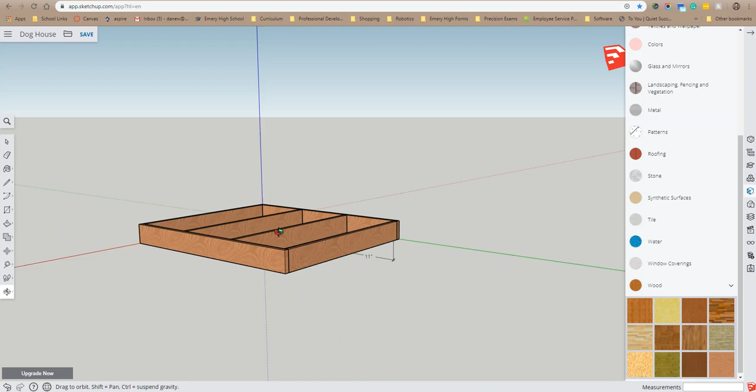Okay, we have our floor built and now it's time to move on. So with our floor here, we have our header joists, one here and one here. Those header joists help our floor joists tie in and make it nice and rigid. So we're ready to put on our subfloor and start building our walls.

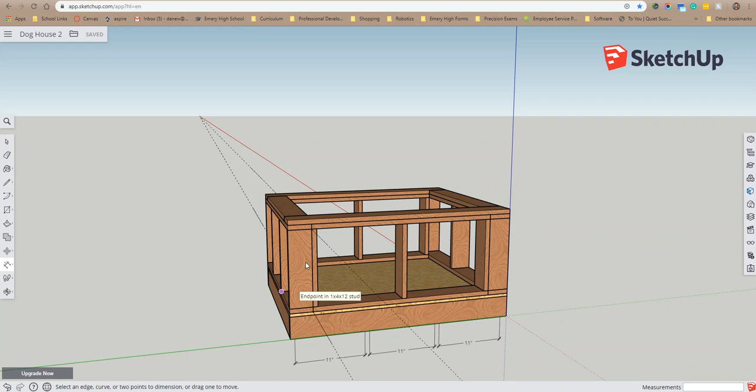Now, I'm trying to be as minimalist as possible while still having the same concepts as a real house. So, for instance, there's a bottom plate and a double top plate, and they're tied together. And these are like our little studs. We got our little corners here.

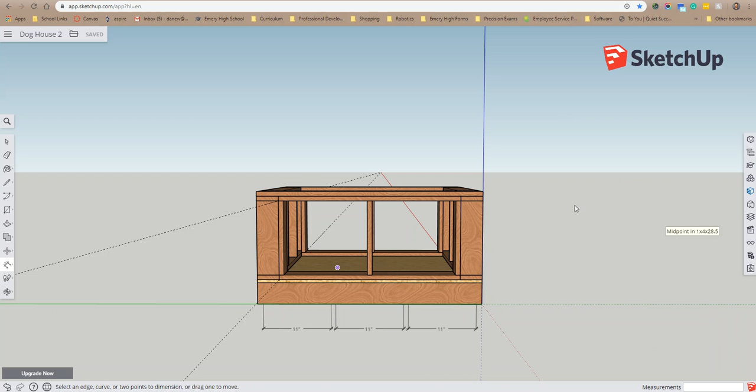So now I want it to still be light. Yeah, we probably could add more studs in here, but it might be overkill for this. So I'm trying to be as minimalist as possible, but still add the features that a real house would have with balloon framing. So with that said, let's get going.

Okay, so first thing we need to do is make our subfloor. We have our floor here. Subfloor goes on top of it, and it's what your flooring will go on top of. So we want to do a sheet of OSB.

The easiest way to do that is to look down on this, kind of a bird's eye view, pick the rectangle tool, click and let go and drag, and make a rectangle similar to the size of our floor. Now I'm not doing it on top of it, because if you build on top of it, sometimes it snaps to it and makes it one thing and it just messes it up. The reason why I'm making it a similar size is because in the bottom right I can see which dimension I need to do where.

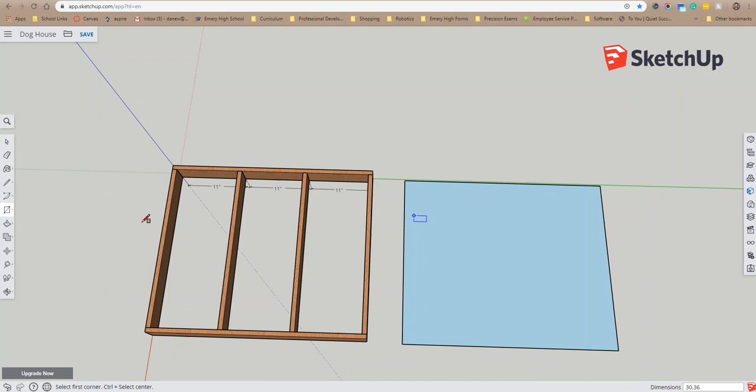So if you remember, our doghouse is 36 by 30. So it looks like in the bottom right that our larger dimension goes first. Oh, second. Okay, so I'm going to do 30 first. 30, comma, 36. Now it should fit this. And if you don't get that right, it's okay, we can rotate it later. Okay, so there it is.

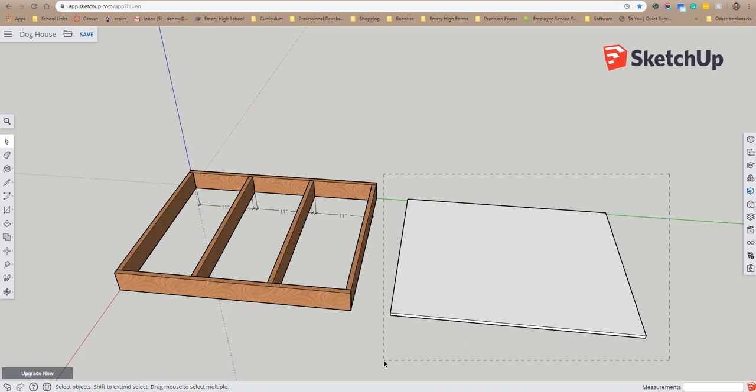I'm going to go ahead and select my push-pull tool, click and let go, drag it up. Remember, this is 1/2 inch OSB, so we're going to type in 1/2, enter. Then we're going to do the space bar or click select, drag a box over the entire thing. Make sure you select all of it. Okay, there we go. And then I'm going to do my paint bucket.

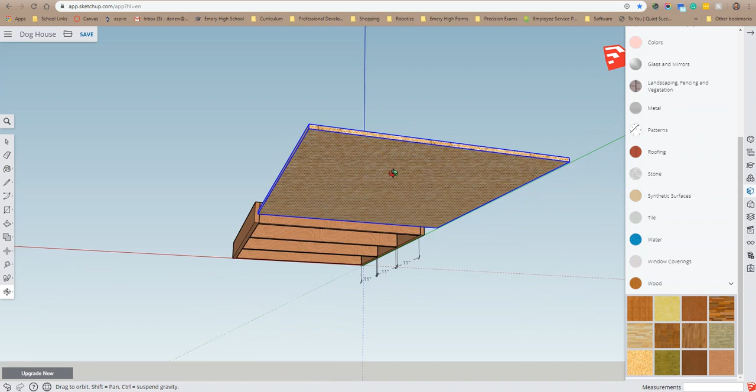And then if this doesn't show up, if it looks like this, you just click on the little search, and then you scroll down, click on wood. Bottom left is OSB, so click on that. Since this is all selected, it should paint it all, and it looks like it did. Okay, you can check it, make sure it didn't miss any places. There's our nice little OSB sheet. It's cut 36 by 30.

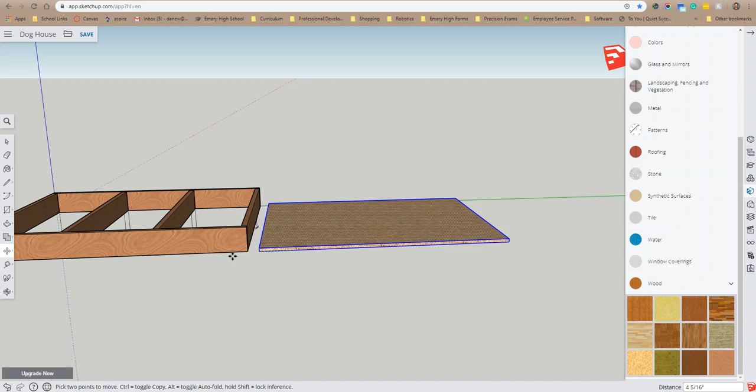Space bar. Now we want to move it, so I'm going to click on the little move tool, and I want to select one of these bottom corners, okay, and zoom in. Make sure you select the corner. Then I'm going to zoom out, and I'm going to zoom in over here and make sure it snaps to this top corner here. Okay, so there we go. Bippity boppity boo. We have our subfloor.

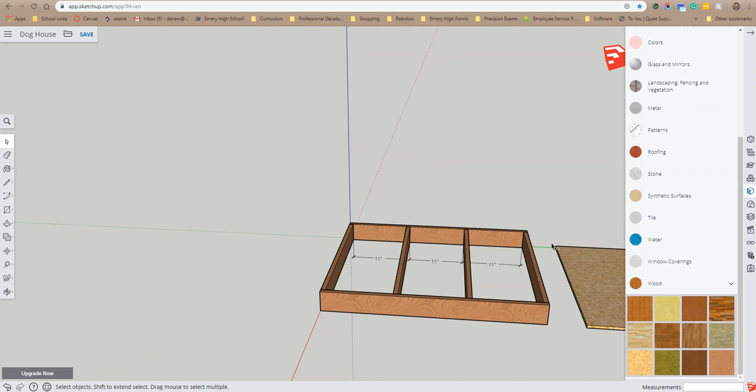Now if yours isn't fitting right, you might need to rotate it. The way you rotate it is make sure it's selected. Once it's selected, oh, you know what I forgot to do? Okay, we're going to back up a step. I painted it, but I didn't make it a component, which could give us problems. So I'm going to go ahead and pan over, and I'm going to select it. I did Control Z to kind of back up.

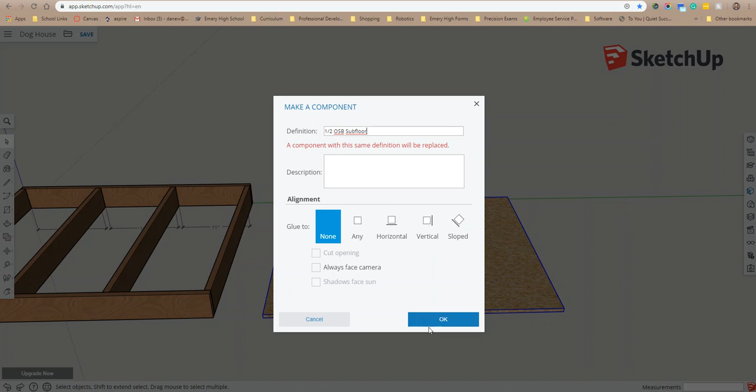I'm going to right click and say make component. I'm going to say 1/2 inch OSB, and I could say subfloor if I want to get specific. I had already made one before, but yours shouldn't say that. Just say okay. Alright. Now we're going to move it. And I think I am going to, well, no, we'll do it the right way.

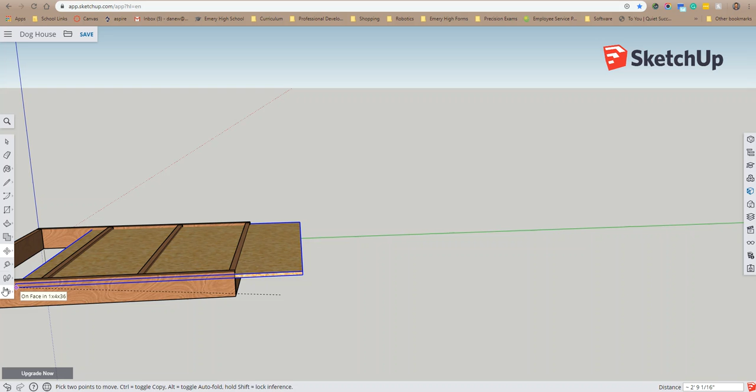Okay, so I'm going to click on this bottom corner here. Then I'm going to zoom out. I'm going to zoom in over here. It looks like I'm going to have to use my pan tool. Okay. So once again, bottom corner, you can zoom in, snap it to that corner.

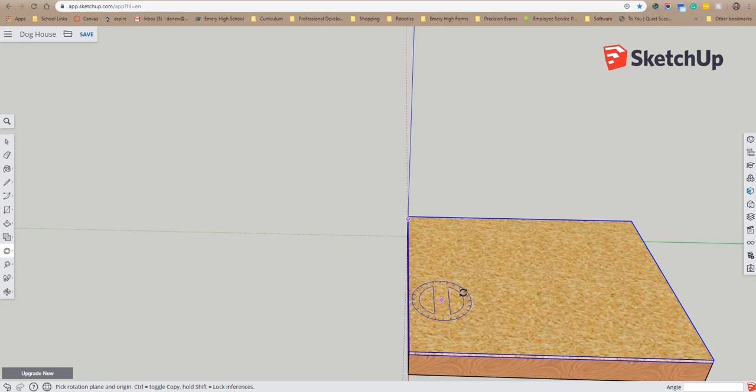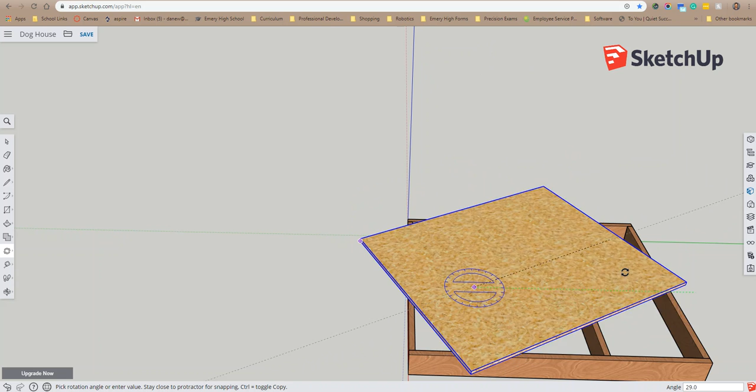Now like I said, if yours isn't correct, you can always rotate it. In the move tool options, there's a rotate, and you can click, and there's a little protractor here. And first you want to line it up with an axis. So right now it's on the green axis. You can click, and then when it turns red, I know it's 90 degrees because now it's on the red axis. So you can always rotate things if you need to and then rearrange them. Kind of cool. Alright.

Okay, so our subfloor is done. Now let's make our components for two of our walls.

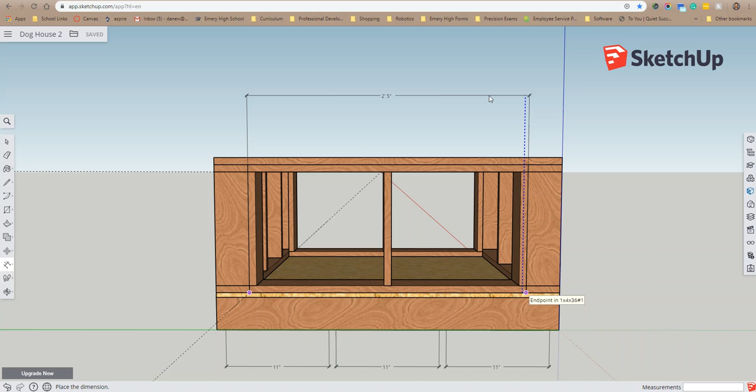So if you remember our drawing here, we want to do these walls here, which actually they look like they go the whole length, but they don't. Take my dimensions, it goes from right here to right here. That's actually 29 inches, but it's on my 36-inch side. These walls take up some of that length, so 29 inch, that's what we're going to call our 29-inch wall.

And we need to make our little studs, which are 1 by 4 by 12s, so they're 12 inches long. So there's 1, 2, 3, 4, 5, 6 of those that we're going to need.

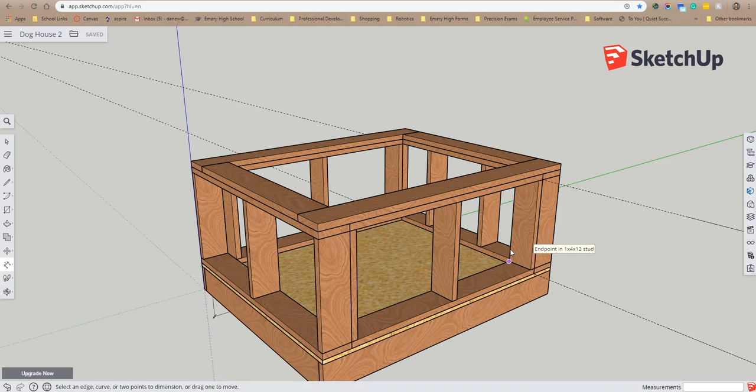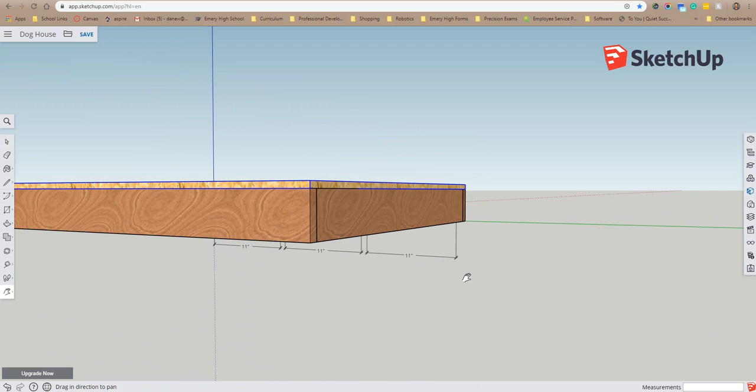So the way that I like to do this is get next to my floor here. Remember, this is platform framing, what we're doing when you're building on top of things like this. I'm going to pan a little bit to the left, this is where I'm going to be working, looking at it from this angle. I'm going to pick the rectangle tool, just snap, click and let go and drag a little box. Now you want it to look flat like that, you don't want to get funky like this and go on the blue axis. If I look in the bottom right, it's going to be 3/4, comma, 3.5.

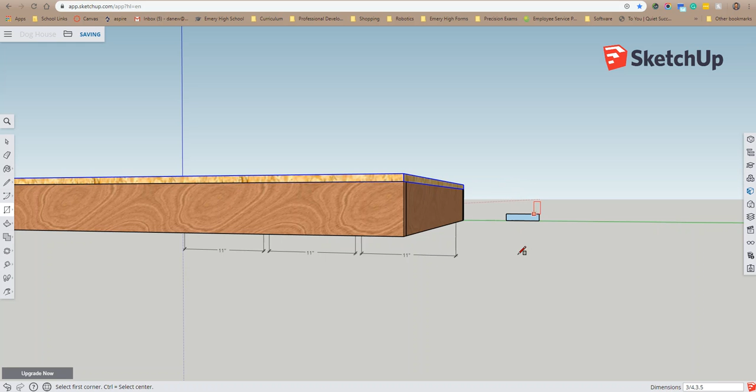Now I'm going to do my push-pull tool and click and let go and drag. Remember, these are 12 inches long, so type in 12, and then I'm going to go ahead and select it. Make sure you select the whole thing, and make sure you don't select any of this, but just this, our little stud. Click over here on the paint bucket.

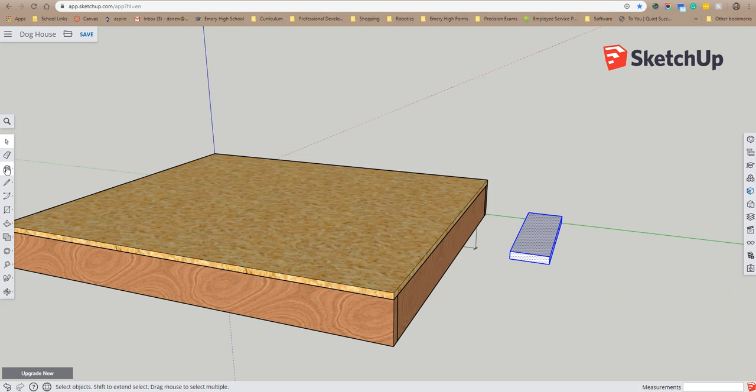Remember, this one is wood, and now I can right click on it and say make a component. Oop, I said make group. Control Z, undo that. So select the whole thing again, right click, make a component. This is a 1 by 4 by 12, and you could say stud if you wanted. Say OK.

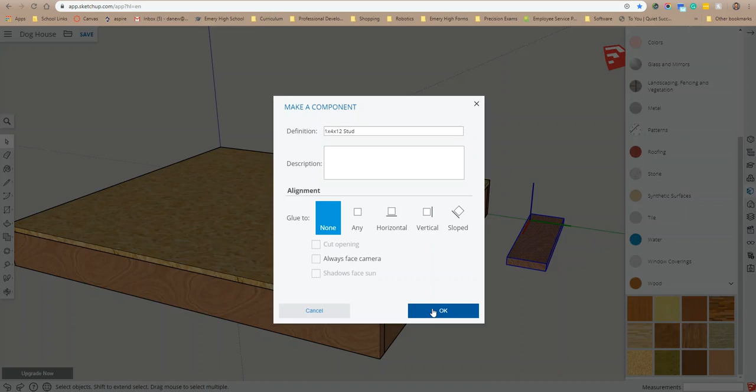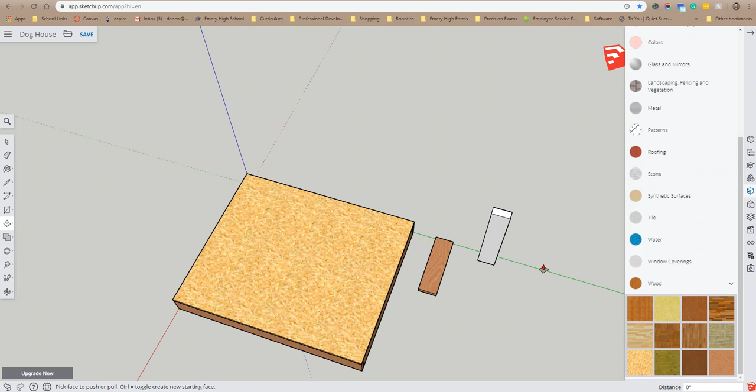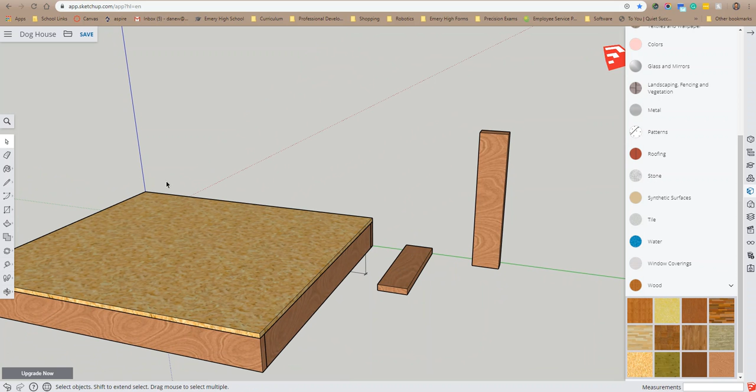Let me show you why I drew it in this orientation. Say I was looking down like this, and I drew a rectangle like this, a little stud, and did the push-pull tool, brought it up 12 or whatever, and then went ahead to paint it. When it's in that orientation, it doesn't paint right. If you look, the grain is actually running the wrong direction. This is running the right direction, so that's why I laid it down like that to start with. There might be a way to fix this, I don't know, you guys might could figure it out. But for me, I'm just going to go ahead and lay them out this way.

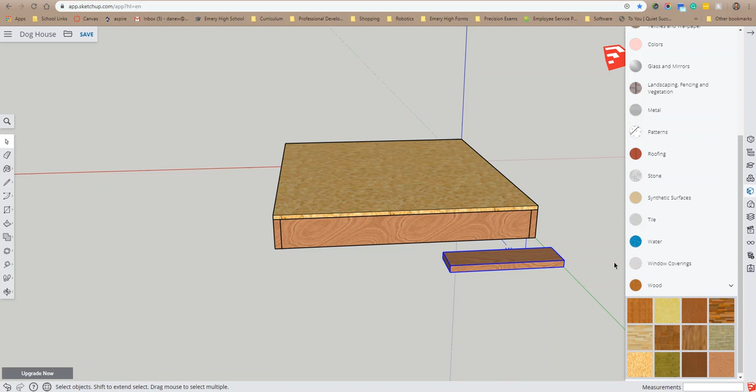So I'm going to go ahead and select that, delete that. Now these 1 by 4 by 12 studs, we need 6 of them. So I'm going to go ahead and copy this one, and then right click and say copy, right click, paste, and just snap them right next to each other. Right click, paste, right click, paste.

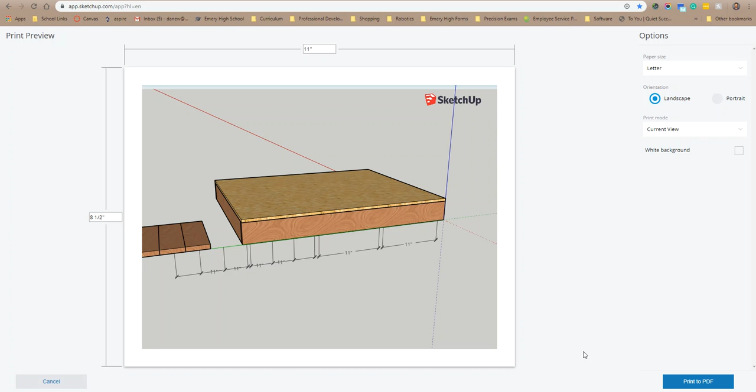And there might be a shortcut to this, like Control P. Nope, that's not right. But for me, I'm just gonna do it one by one. Okay, so let's see if I can get out of this now. I'm gonna say cancel. Okay, so it's 1, 2, 3, 4.

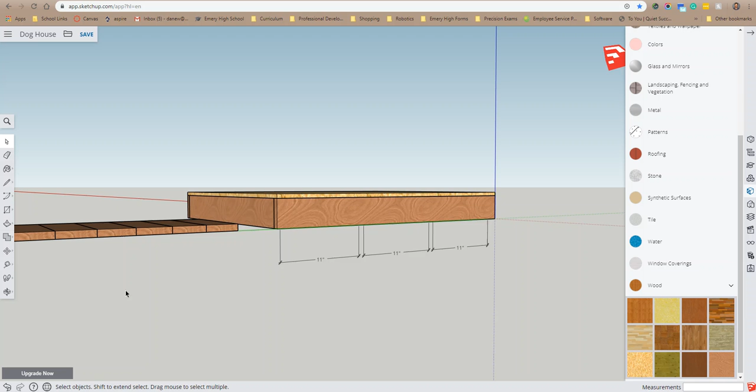All right, we need 6 of these, so I think I have to select it again and paste. Right click and paste. 1, 2, 3, 4, 5, 6. Okay, and it's added dimensions automatically. I don't know why mine did that, but I'm gonna select all those and just delete them. Alright, so we're getting there, we just gotta build a couple more things.

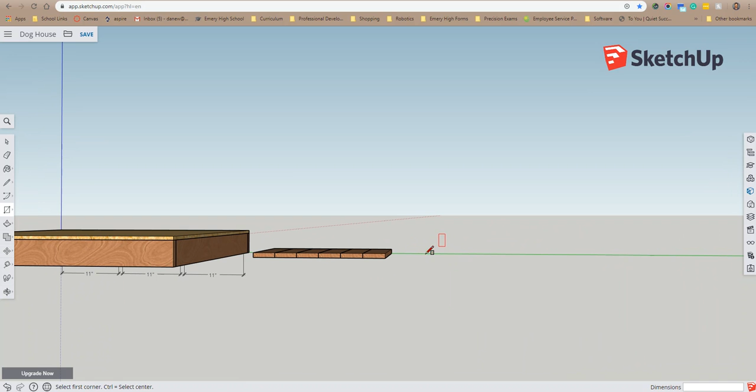So I'm gonna go ahead and pan. And we need to make 4 1x4 by 29s. This is good practice to just build a bunch of these, helps you get comfortable with it. So I know it takes a little bit of time, but it's good practice.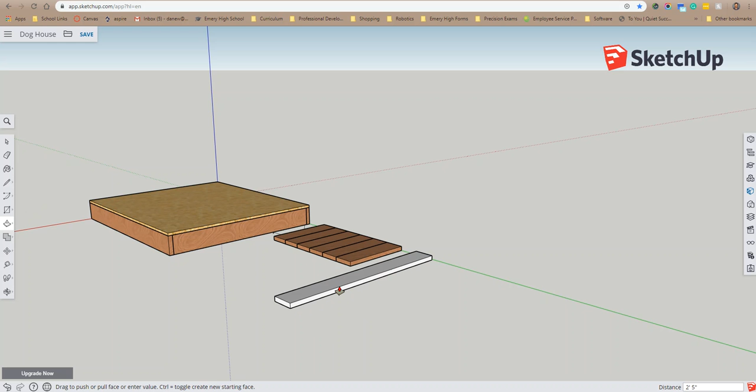So, once again, a 1x4 is actually 3/4, comma, by 3.5. Enter. Alright, and then we're going to push-pull it. These are 29 inches long. Then I'm going to hit spacebar so I get my selection arrow, select the entire thing, and paint it.

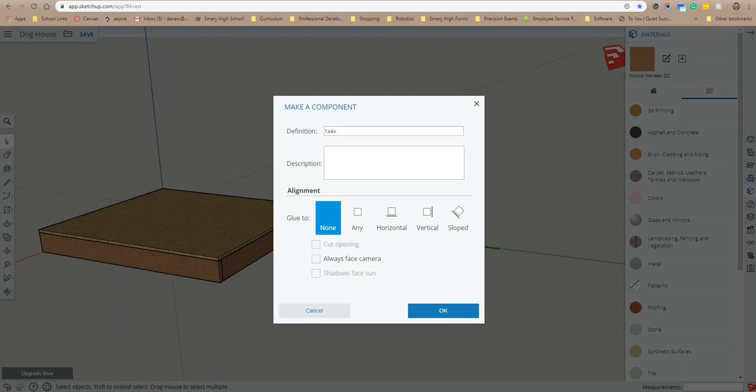It's already on the wood color, so I painted it. Spacebar, right click, you can just say make a component. This is a 1x4 by 29. Okay, and we need 4 of these. So once it's a component, I can just copy it, paste it, right click, copy, right click, paste, and just snap them to each other. One more, goes pretty quick once you get the hang of it.

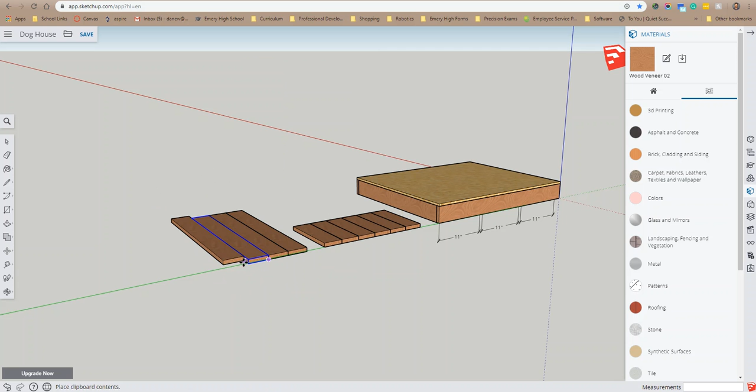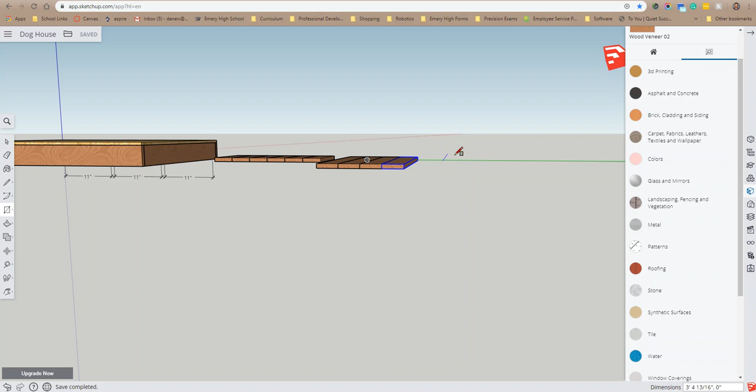Okay, we're almost done. So now we need 2 more boards, and they're going to be 36 inches long. These are our top plates. So let's pan over, give us a little more room. Click on my scroll wheel and orbit. Draw a rectangle. Whoa, let's zoom in just a little bit.

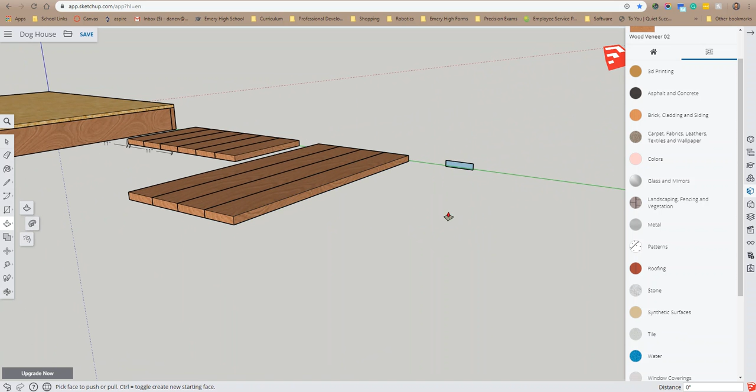Okay, this one is 3/4, comma, 3.5. Once again, you can probably find a faster way to do this, but this is just good practice. Push, pull, push it, drag it out at 36. Okay, spacebar, select it, gonna paint it.

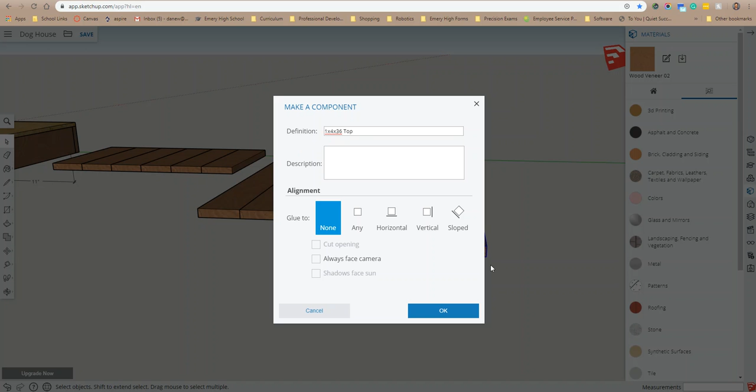And then I'm going to spacebar, right click, make a component. This is a 1x4 by 36, and I could say top plate. Say OK, and we need 2 of these. So I'm going to right click, copy, right click, paste.

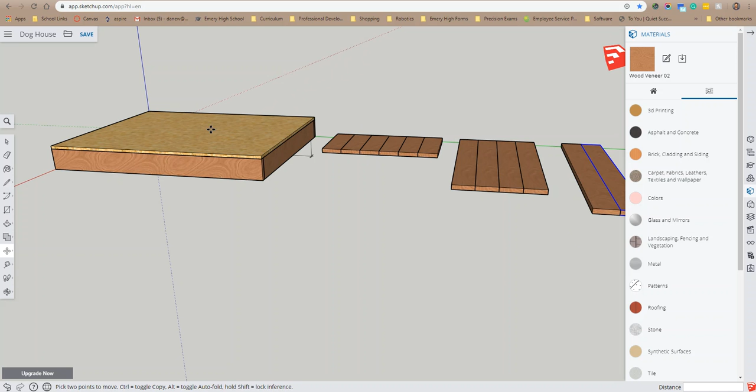Now we have all the components to make 2 of our walls. So what I'll do is in the next video I'll show you how to assemble these 2 walls, and after that we'll finish off with the other 2 walls.